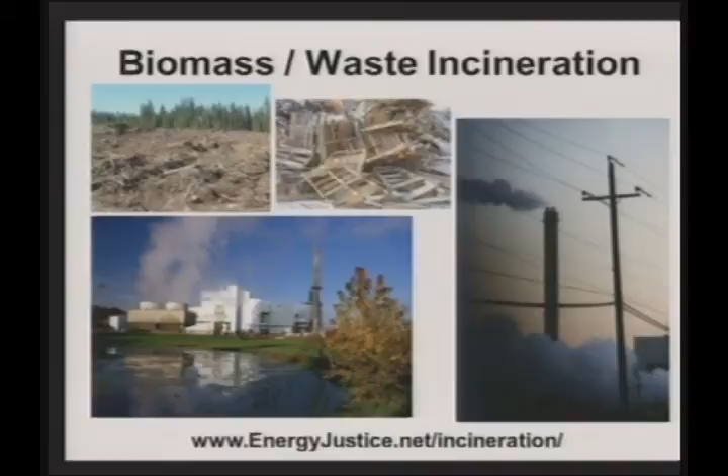So we have a lot of information up on our website. If you go to energyjustice.net/incineration, you'll find copies of whole reports that were written about pyrolysis and other types of incinerators. So feel free to use that information as a resource and research base as you start to learn more about this stuff.

Now, there are a lot of names tossed around for different types of incinerators. They know that incineration is a dirty word. I was actually sitting in the meeting of the trade association for the waste industry at a national trash incineration conference a couple years ago. And having paid to go to the conference, I was welcome to sit in that meeting, and they had debate over whether to use the I word.

And one person was complaining that too many of the presenters at their own conference used the I word, and that was a bad thing. We shouldn't allow them to do that. And then others in there disagreed. And one woman with the International Solid Waste Association even said, this is a direct quote, I think we should call it incineration because that's what it is. And I furiously wrote that down, like, they admitted it, yes.

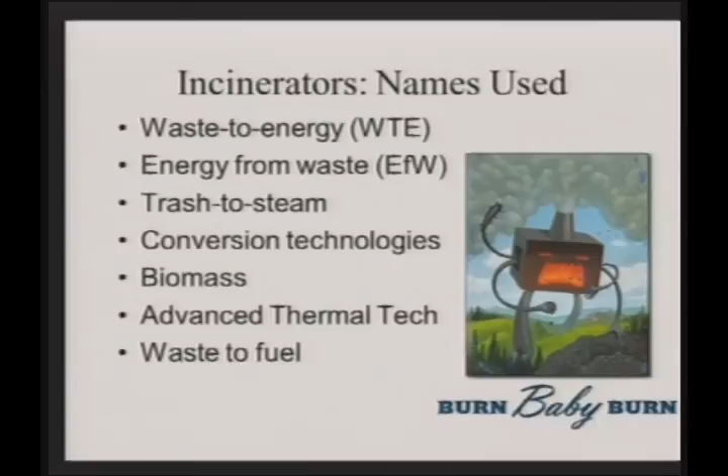So they have this contest going on around the country, basically, and they find every way they can describe it other than with the I word, because so many hundreds of these have been stopped by communities like this around the country and around the world when they realize what is actually in store for them. One of the people there actually made a point. He said, we went through all this trouble to change the name of our division from waste-to-energy to energy from waste. It's crazy.

So some of the technologies that we're talking about include pyrolysis, gasification, plasma arc, these different types of incinerators. And the only thing that makes them different than a conventional incinerator is that they do things in two steps. Basically, if you light this piece of paper on fire, technically, the paper is not even burning. If we want to get technical about it, as we did over lunch with some of your city officials and one of their engineers, what's happening is that it heats up and some gases are created, and then the gases, a smidgen away from the paper, are what's burning.

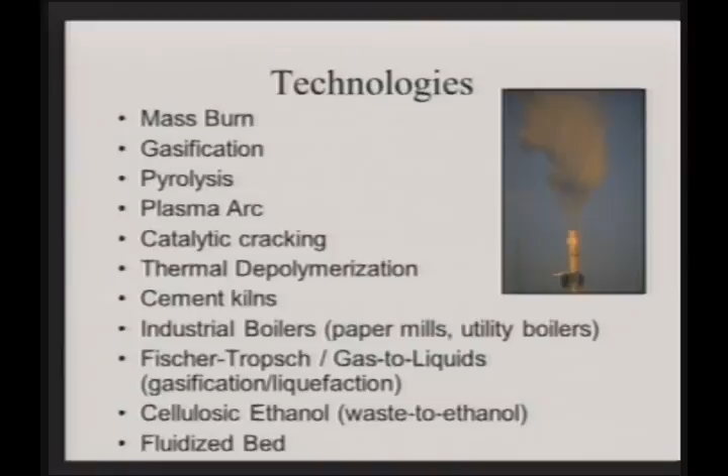So even a conventional incinerator, you can argue that it's gasification if you want to. And that's what they're doing here. They're basically saying that that first step of turning it to gas is different from the second step of the heated gases catching fire. And that's what they're going to be doing, accomplishing incineration in a two-step process where the steps are a little more separated than you usually get, but it's still incineration.

And this is the EPA's actual definition. For those of you who are policy wonks, I have the reference right here, 40 CFR 60.51a. That is a government definition. It's in the Code of Federal Regulations. It's been there for a while. This is nothing new. This is the definition of a municipal waste combustor. At the bottom here on a different part of EPA's webpage, they even spell out a municipal waste incinerator is functionally synonymous with a municipal waste combustor.

Okay, so this is a definition of incineration for EPA. This is how they define it. And you'll see it means any setting or equipment that combusts solid, liquid, or gasified municipal solid waste, MSW, including but not limited to pyrolysis. And it has a definition for pyrolysis, which says a unit that produces gases through the heating of municipal solid waste, and the gases are combusted and emissions vented to the atmosphere.

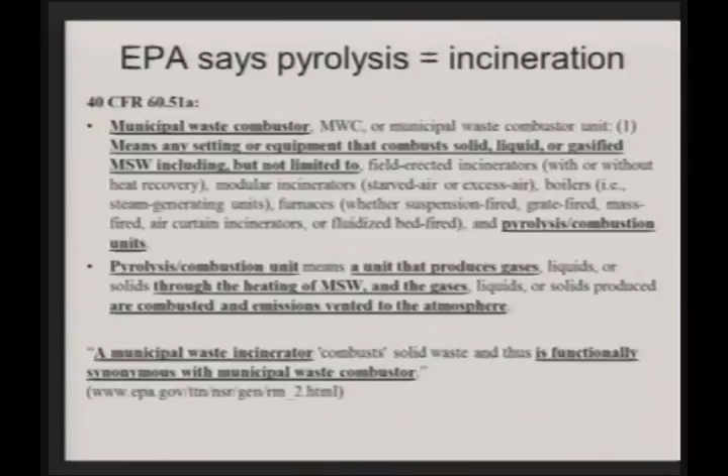That's exactly what Pyrolyzer is talking about doing here. So this couldn't be more clear that the federal government says this is an incinerator. So folks can have the linguistic games they want to play here and threaten to sue people for calling it what EPA knows it is and regulates it as, but I think this question is pretty settled. The European Union has similar definitions that call pyrolysis incineration as well.

Now this here's probably hard to read at this distance, but I had to throw this slide in because I've seen this presented at waste industry conferences multiple times by this outfit called GBB, Gershman, Brickner, and Bratton. They are the leading incineration consulting firm in the country. They constantly get hired by local governments. They constantly speak at industry conferences, and if anyone wants to know what's the state of incineration in this country, they go to these guys.

This outfit compares the different types of incinerator technologies and says what the risk is. And under pyrolysis, under risk summary, it says high. It's high risk. And the reason they put under risks and liabilities says previous failures at scale, like the scale they're talking about here, and even much smaller scales, uncertain commercial potential, no operating experience with large-scale operations.

These are the industry folks talking to each other. This isn't Greenpeace. This isn't some radical environmental group saying this is a problem. This is the industry's own consultants saying this stuff doesn't work and it's high risk.

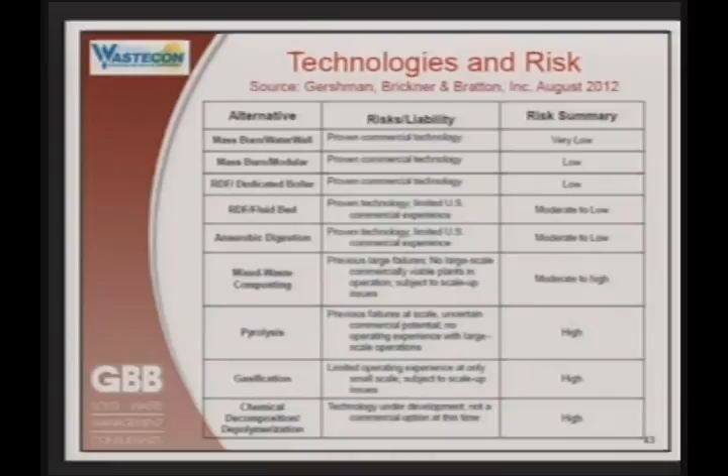In DC, where I'm currently living, they have an incinerator that they're pursuing building there. I just did a Freedom of Information Act request and got back information that showed that there's a different company we didn't even know about that was courting the mayor's office, and the mayor's office was telling the Department of Public Works, we think this is a good idea, you should go ahead and look into this. And the Department of Public Works folks, who are very excited about pursuing an incinerator of some sort, even wrote back and said, this gasification stuff, it's not been successfully modeled in the US or abroad.

And they give an example of a project in Florida that has run into problems getting even a turbine manufacturer to accept the risk and give a warranty on it, because the fuel is not clean enough to actually burn effectively. Japan has had several that run intermittently, as they point out. And these facilities rely on a more homogeneous feedstock, a feedstock that is more consistent than trash. And that is exactly the problem you're going to run into here and why so many others have run into this problem. One of the places they ran into a problem is in Chester, Pennsylvania.

This company came in about 5 years ago, an Israeli company called Koach Energy. It's actually Hebrew for energy, so it's Energy Energy. And they wanted to turn tires into petroleum with a pyrolysis process, pyrolysis and gasification combined. It would have been the largest of its type in the world, at about 2,400 tons per day at the higher end of the scale of how big they wanted to build it.

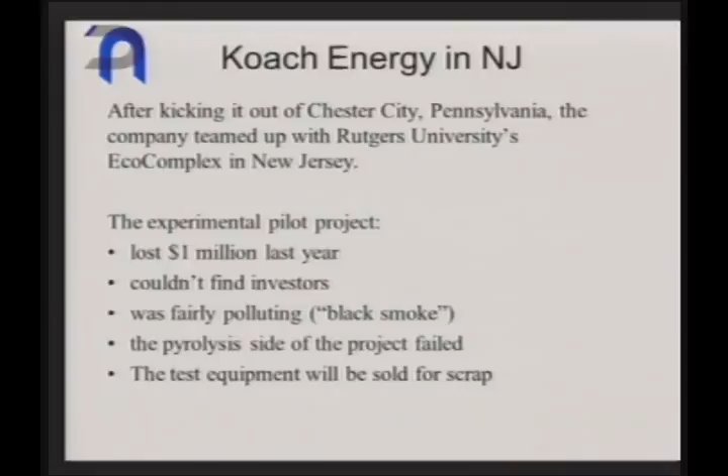When they ultimately built a very small pilot plant across the river in New Jersey at Rutgers University's EcoComplex, they ran this project and ended up losing $1 million when they just built this little experiment. They couldn't find investors for it. They found it was very polluting, with black smoke coming out. The pyrolysis side of the project failed, and they decided that they would sell the test equipment for scrap.

So some basic lessons here. Any kind of black box project, an incinerator of any sort, you have this garbage in, garbage out reality. You put mercury in the front end, mercury is going to come out the back end. You put chlorine in the front end in some form, it's going to come out the back end in some form. You can't make things magically disappear. These don't turn waste into energy. They turn it into toxic ash, or in this case char, and toxic air emissions.

Also, nothing is 100%. So when they say they have pollution controls on there, there's still things that go through, and we'll get more into that in a minute. Even when they say there are small amounts of something, like mercury, like dioxins, those small amounts matter, especially when they're small percentages of 6,000 tons per day. That's a large number, and so those small amounts are going to be quite significant. In our experience, we've seen hundreds of these proposed across the country and even across the world. Almost all of them never get built.

There's not one of this sort operating commercially in the whole country, yet many have been proposed. So the idea that somehow they're going to get this built at all, no less by 2016, I believe is a fantasy, and I don't think is realistic at all.

And if pyrolyzer is the answer, whether we're talking about for energy, whether we're talking about for managing waste, or whether we're talking about for creating jobs, someone asked the wrong question, because it's the worst possible answer for all three of those things.

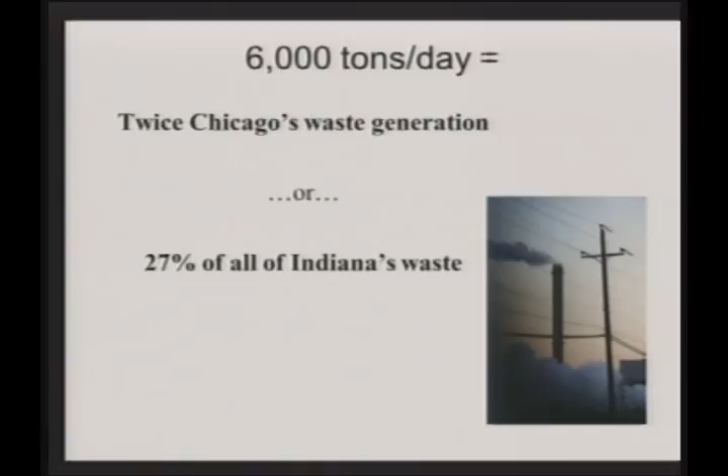The largest one I'm aware of in the world for any kind of incinerator is 4,100 some tons per day. The largest pyrolysis one is 440. This would be 10 to 15 times as big as the largest one of its type in the world. That one's in Japan.

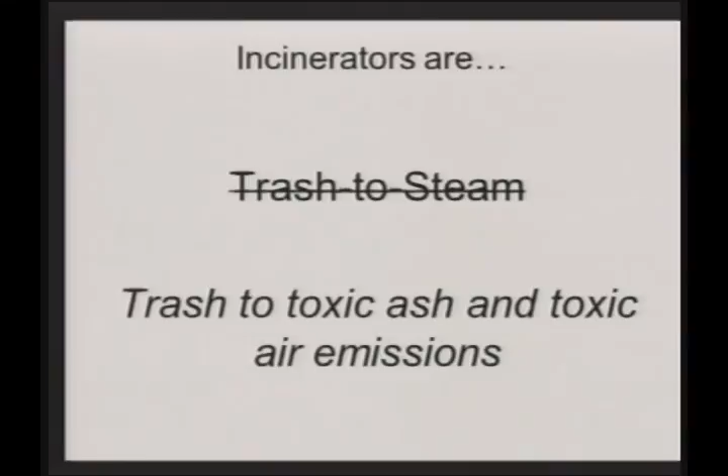So incinerators are not trash to steam. They're trash to toxic ash and toxic air emissions. Like I said earlier, this is the ash we can replace with char in this case. Same basic idea. And they're not waste to energy facilities, they're waste of energy facilities, because they actually destroy 3 to 5 times more energy embodied in those materials than you get back. If you have to recreate the paper and the plastics and all the things that are in there, it takes a lot more energy to do that than if you burn it and get a little bit of energy back.

A couple months ago, I testified in DC, sitting at the same table as the head of the trade association for trash incinerators in this country. And they basically admitted that I was right on 2 counts, that they were more expensive than landfills and that they're dirtier than coal power plants. And in weaseling out of the coal power plant thing, they basically said, well, we're not power plants.

Even though they make this whole big issue about how they're energy facilities, their trade association, after changing names a couple times, is now called the Energy Recovery Council. Yet they said, and this is on video on the website if you want to find it, I'll be glad to send people links. He said, a waste-to-energy plant is designed to manage solid waste. The electricity output is a secondary function.

And if you look at where their money comes from, this is also evident because most of their money comes from getting paid to take waste, not getting paid for their electric sales. So it's not a power plant. If people were trying to build a power plant, they wouldn't go for the most expensive type that there is, which I'll get into in a moment. This is just the same guy admitting that's also the most expensive way to manage waste, that's more expensive than landfills.

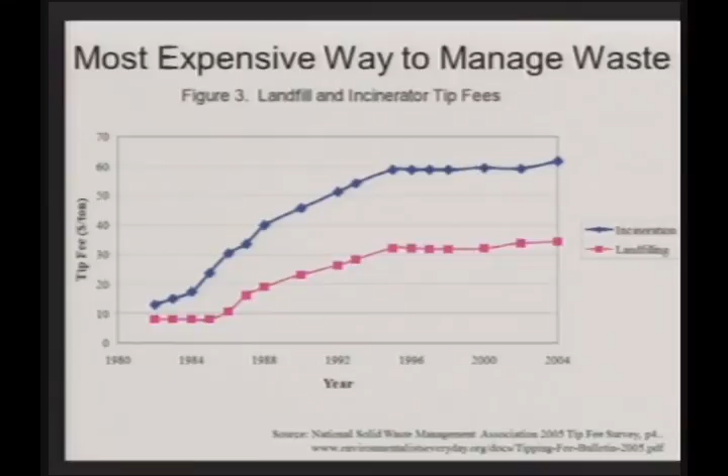Now, this is data from the waste industry. When the National Solid Waste Management Association compared the fees of disposing of waste at landfills versus incinerators, they found that incinerators have always been more expensive, and that difference is widening over time as air pollution controls become more expensive to install. This is comparing traditional incineration. Pyrolysis is even more expensive than normal incinerators are.

This here is data from the federal government, from the Energy Information Administration, which is part of the Department of Energy. In 2010, they put out the latest data on how expensive different forms of energy are. So if you were saying, gee, we have a problem here in Logansport, we need to replace the coal plant, what do we do? Well, you would think that your leaders would not go to the most expensive possible option according to the federal government.

Whether you're talking about the cost of building it or the cost to operate and maintain it, trash incineration, and this is the conventional kind, not the more expensive kind they're entertaining here, is more expensive on both counts by far. Even wind and solar are cheaper. So if there's this debate over how to do your energy, gosh, I mean, I would jump straight to wind or solar if that were the option, because it looks a lot better than what they're looking at here.

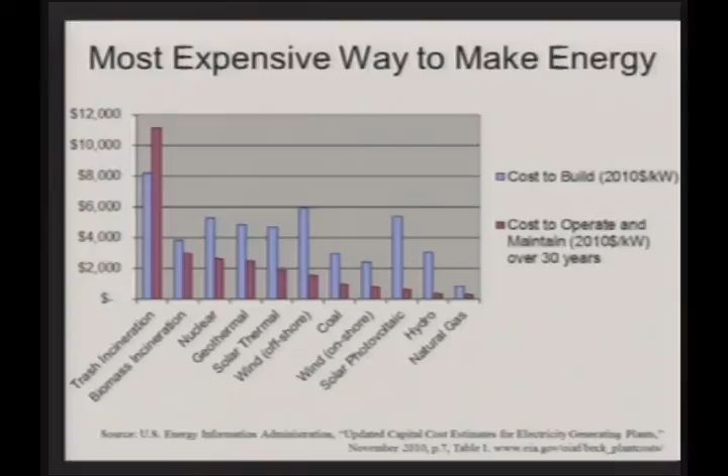I covered a little bit of this, but I'm going to run out of time, so I'm going to gloss over some of these things. But one of the key points here is just that the types of contracts that they need to run incinerators, because they're so much more expensive than landfills, are ones that make sure that the communities are locked into giving a certain amount of waste. And if they don't, they have to pay even if they didn't give that waste. They're called put or pay clauses in contracts.

And so this is one of the ways that the industry stays alive, because they can't compete with landfills. So they lock local governments that are essentially suckers into these types of contracts. Some communities, like in Claremont, New Hampshire, 29 towns filed for bankruptcy because of this specific type of contract that they were locked into, and the court denied them that, and they had to pay up anyway.

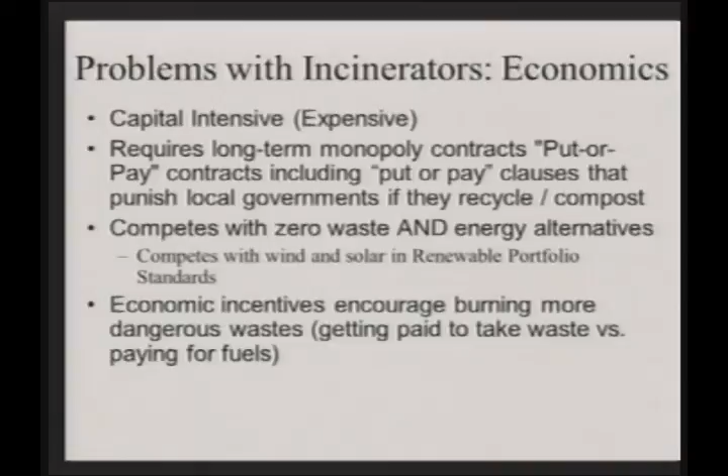Incineration also competes with recycling. They need to burn papers and plastics, and so when they talk about turning things into refuse-derived fuel here, they talk about taking out the metal and the glass, but the rest of the recyclables that burn well, of course, they want to keep in, and so they're not going to make sure you recycle them. They're going to make sure you feed them into this burner.

But especially given how big it is, they're going to need to feed a lot of this stuff into the burner, which is why in Detroit, where one of the largest incinerators in the country is, they have a miserable recycling program. They were pretty much non-existent in that city for many years.

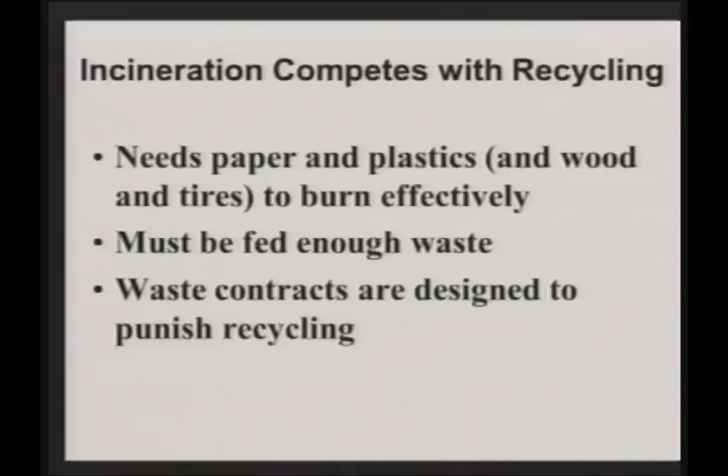Now, 10 years ago, I warned the city of Harrisburg, in my home state of Pennsylvania, that they were going to go bankrupt if they went ahead and borrowed more money to put into the incinerator they already had, which was losing a lot of money over time. You see their existing debt in that first column there. Their officials, with all their high-priced consultants, said that if they pour $125 million more into rebuilding the plant, they're going to wipe out that debt and end up in the black, actually making money.

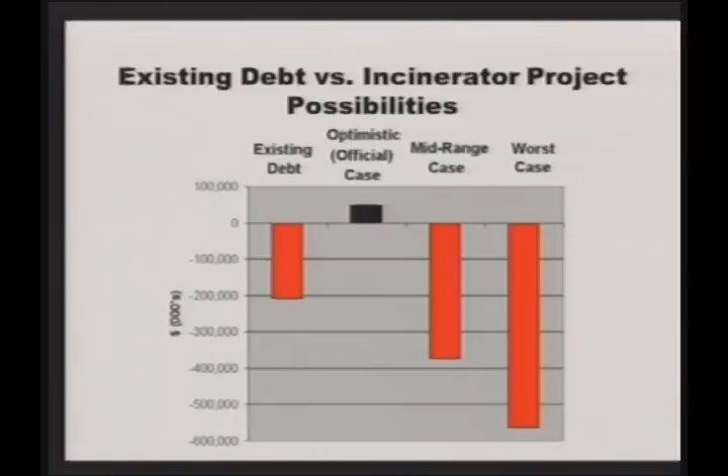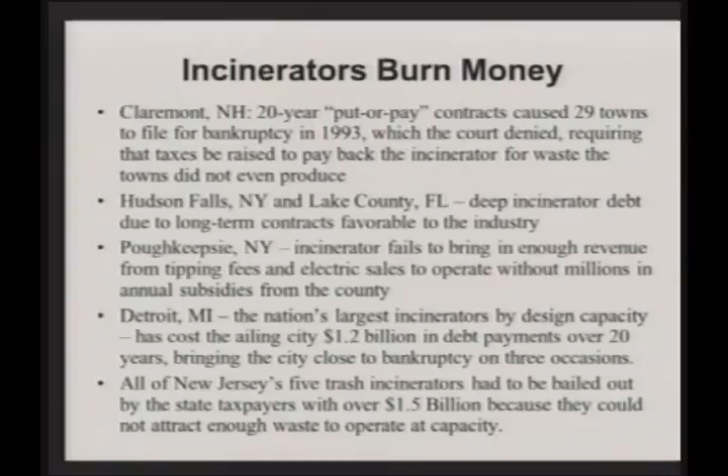I put some realistic assumptions into that and found out that the mid-case and worst-case scenarios were that they basically drive the city into bankruptcy. And after every slide I told them, this is going to put the city into bankruptcy. 8 years later, read the headlines, they were bankrupt, and now the state has taken over the city. A lot of other places have come close to this and have been bailed out or faced other economic consequences. These are just some examples of those places, which I won't go into detail with right now.

So it's also the worst way to create jobs. If we're concerned about jobs, and we rightfully should be, the last thing we want to do is build something that creates very few jobs per amount of waste processed or per amount of money spent on it. Landfilling and incineration both create about 1 job per 10,000 tons of waste that are processed each year. You can get about 10 times as many jobs by recycling.

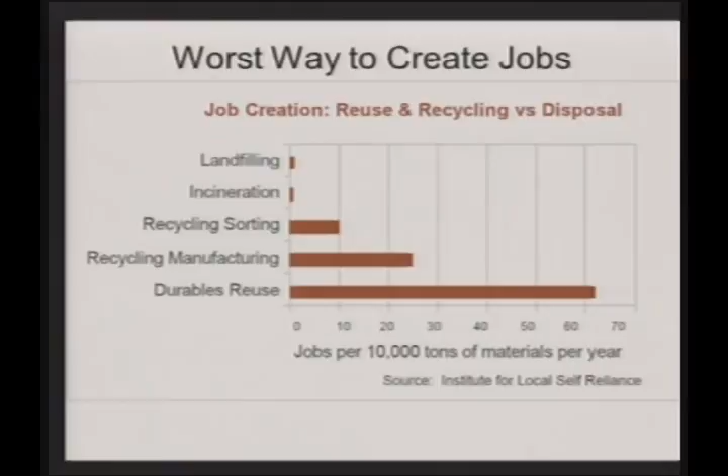And some cities like San Francisco just reached 80% diversion from landfills and incinerators with what they call a zero waste program that gets them as close to zero as they can. And that includes composting, recycling, reuse, and all those different pieces of the solution. This is just the same data in more detail. You'll see 10 times more jobs in the conventional recycling facilities, MRFs, or material recovery facilities. Other types of things like reusing computers, 296 times more jobs than you get if you were burying or burning those.

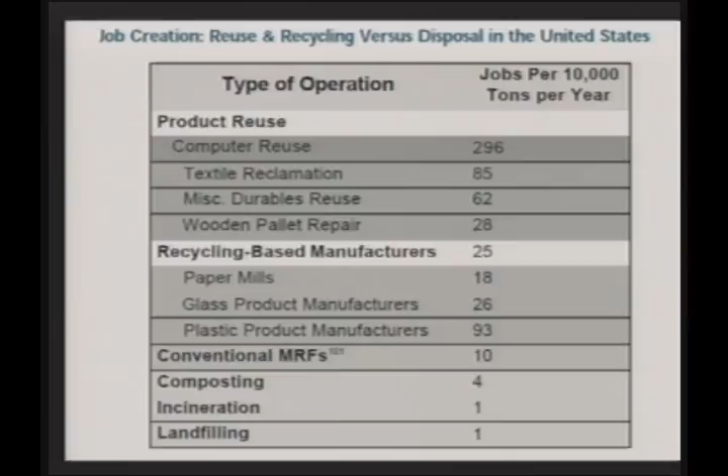It's also the most polluting way to make energy. And this is data from the federal government, most of it. Some of it comes from state governments. This is comparing trash incinerators to coal plants per unit of energy. So if you made them the same size and gave an honest comparison, you'd see that for all these toxic and other types of pollutants, they're far more polluting than even coal is.

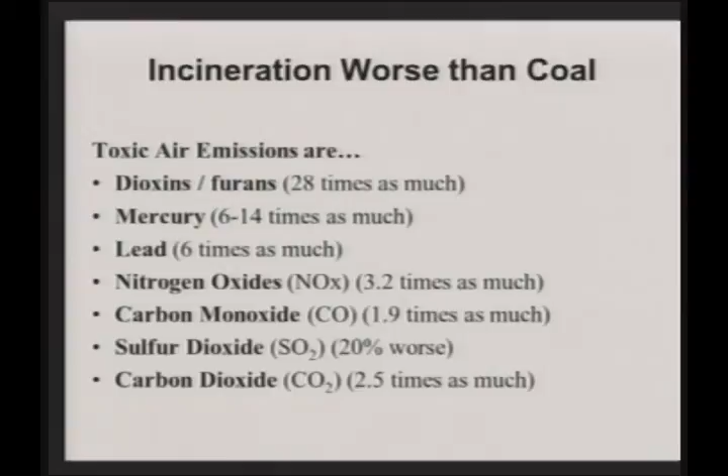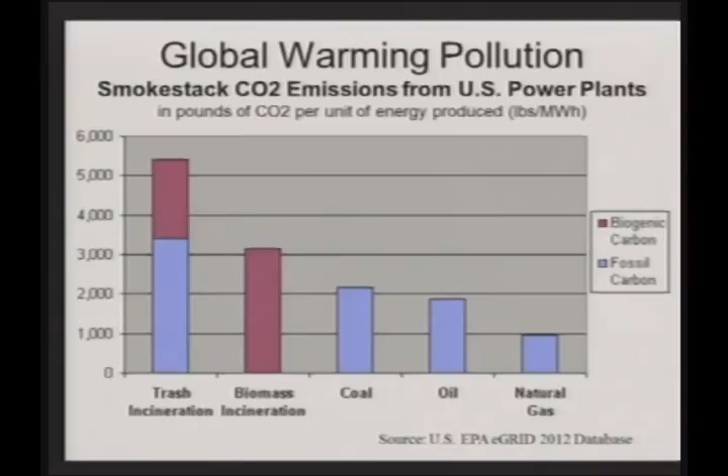This is the same chart just shown in the ratios, so you can see how it compares to coal for these different pollutants. And here is similar stuff, but on the global warming pollutant, carbon dioxide. Trash incineration is actually 2.5 times worse than coal for global warming. So all these different pollutants make them worse than landfills.

They're basically skyfills. You take this pen, for example, and if you try to breathe or drink the toxins in this pen, it's going to be really difficult. You throw it in a landfill, it's going to take a long time until these things are breathable and drinkable. You put this in an incinerator of any sort, pyrolysis included, and pretty quickly, some of these are going to end up in the air. Some of them are going to combine into chemicals that weren't even there in the first place, like dioxins, that are extremely toxic and will end up in the air.

And the rest that don't, say you have the best pollution controls ever, which is really, really expensive, then you'll have less in the air and you'll have more in the solid waste and then the liquid wastewater that you have as well. And these will be much more available to your ability to breathe and drink them. And when that solid waste goes to a landfill, it's going to be more toxic for the groundwater than if you just dumped all the waste there directly.

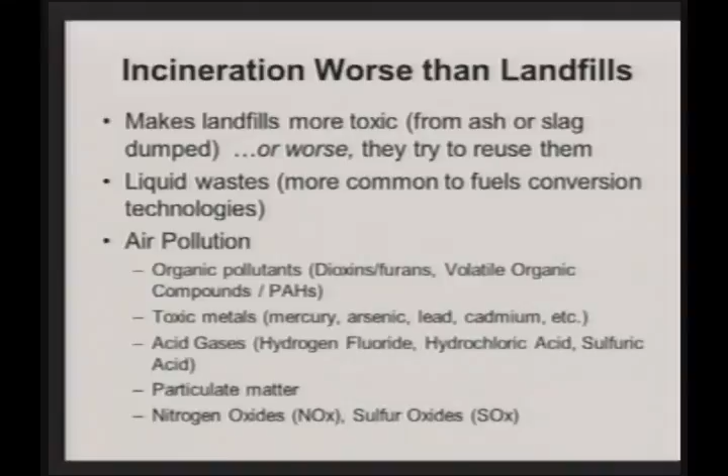The company's basically saying that they're going to continuously monitor the pollutants, and you don't have to worry because, the same song and dance that every company has, they're going to be fined so heavily if they go over any limits. But they basically admit that they're only continuously testing for certain pollutants. Periodic testing will be required for other pollutants.

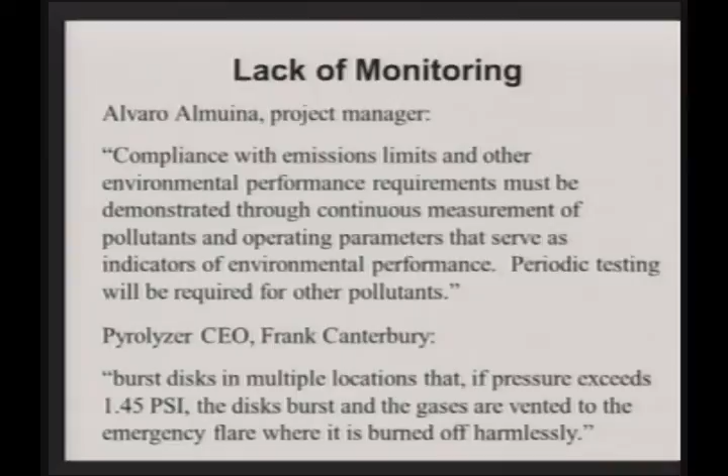And they also admit that whenever there are pressure problems, things will not even go through the pollution controls. They'll just go and get burned off in a flare, bypassing the pollution controls when there are these emergencies like pressure problems in the facility.

Now, the technology exists to continuously monitor a lot of different compounds, the toxic ones and the non-toxic ones, but they're not going to use it because they're not going to be required to by the state. Generally, only 3 pollutants, none of which are the toxic ones, have to be tested continuously. The rest, 1 day per year.

It's like having a speed limit where 1 day a year there's a speed trap set, and the person driving knows that it's coming because there's a big sign that tells them it's coming. And their brother is operating the speed trap, because they hire their own consultants to do the testing. No wonder they don't find many problems.

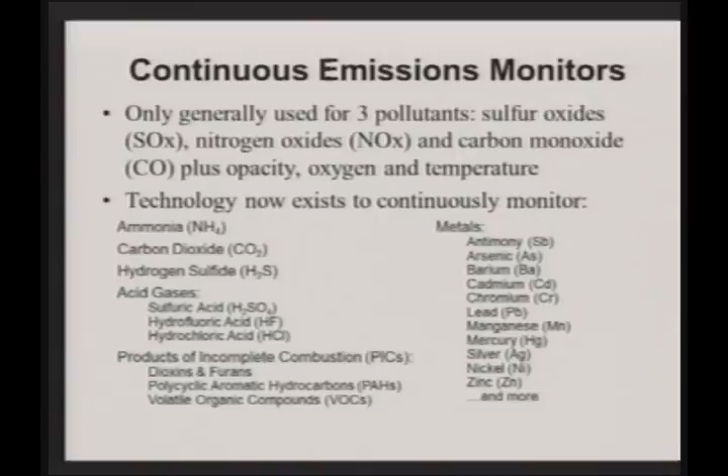And this is how incinerators and a lot of smokestack facilities are usually regulated. When they do this, sometimes they still find violations, but they're on their best behavior, and if you actually used continuous testing, you'd find that there are a lot more violations going on on a daily basis that you don't know about, and they pretend it doesn't hurt you.

I'm going to skip over some of this because I'm running out of time. Let me see.

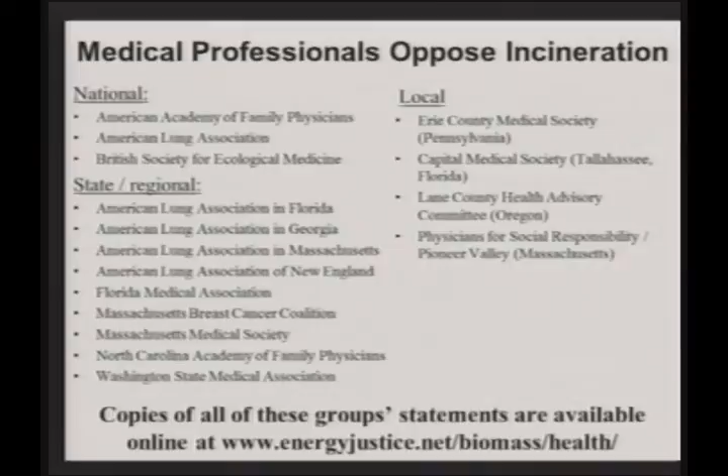The British Society for Ecological Medicine put out an extensive report on trash incineration in particular, talking about how it's a very big problem and should be opposed. The Erie County Medical Society was specifically referring to tire incineration, which is another thing that's proposed here. So there's a lot of concern in the medical establishment about these for community health.

And I know I'm running over. I'm getting the time thing. Can I go into just cover some of the dioxin stuff?

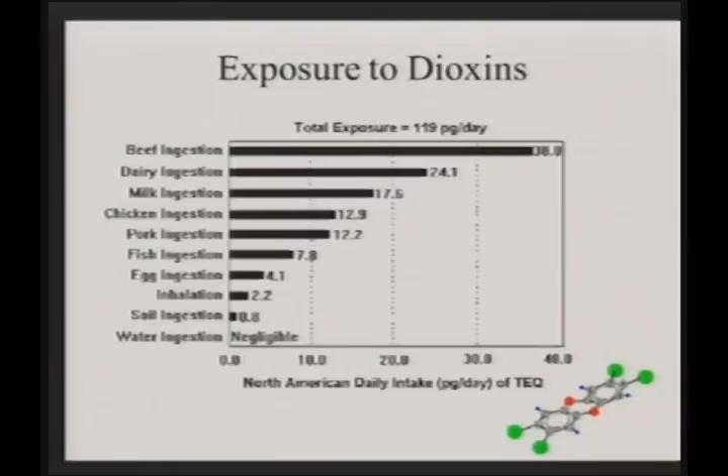Okay. So dioxins are the most toxic group of chemicals known to science. They largely climb up the food chain and end up in meat and dairy products. About 93% of the dioxin exposure you get is through meat and dairy. And it's created when you burn hydrocarbons, anything like paper or plastic, when there's oxygen present and chlorine present.

Now, the companies claim that they run at low temperatures and that they don't have to worry about dioxins because dioxins are formed at high temperatures. They're wrong. EPA's own reports and all the science on this show that dioxins are formed at relatively low temperatures, around 200 to 400 degrees Celsius. This is the temperature range when it's cooling down after it's processed.

But Pyrolyzer brags about how they're operating at low temperatures, so they're operating closer to that range where dioxins are formed. And there is oxygen in that pyrolysis stage because their own data in their own report says so. There's carbon dioxide and carbon monoxide coming out, and the O's in CO and CO2 are oxygen. 20% of what they say is in the gas coming out of that pyrolysis unit is oxygen.

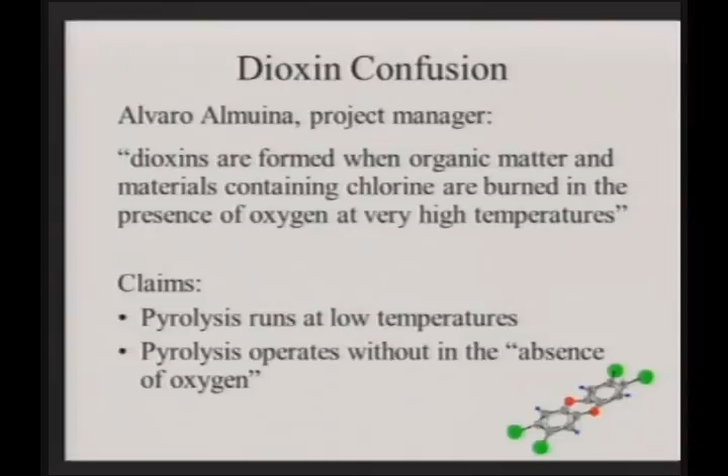So they have all the ingredients they need to make dioxin, and some of the pyrolysis plants, like the one Bradley talked about in Romoland, California, have had problems with dioxin emissions because they are designed in ways that create dioxins.